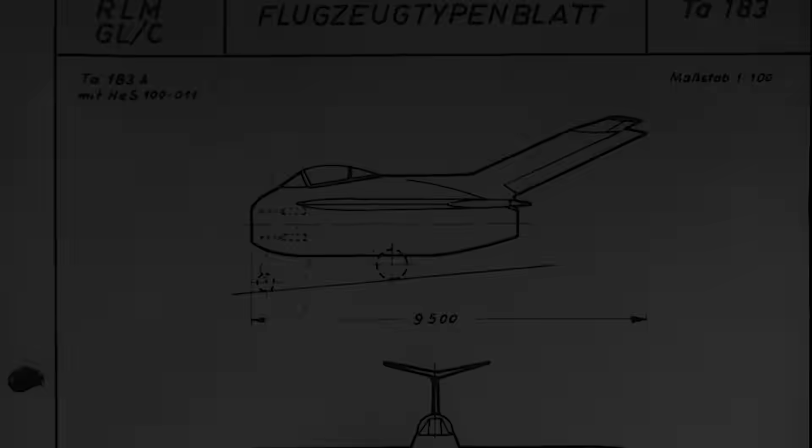However, they were admittedly very capable. The Americans captured Willy Messerschmitt and his P-1101 prototype, along with his aerodynamics team. The Soviets, advancing from the east, captured Berlin and all the technical documents, design plans and wind tunnel data reports from the Reich Air Ministry. But Focke-Wulf and their innovative TA-183 Hunchback design models were captured by the British, who then shared this information with the Americans. Anyway, perhaps not surprisingly, the TA-183 is the grandfather of both the MiG and the Sabre.

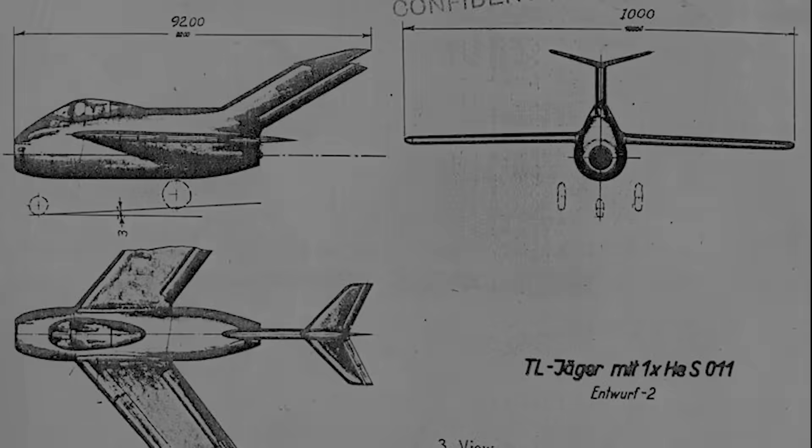But before this absolute mountain of captured data could be inhaled by American scientists, the US Air Force had already put out a request for a new jet. North American, the designers of the P-51 Mustang and B-25 Mitchell, were about to submit their own design, the NA-140, a denavalized version of the Navy's NA-138, which would go on to become the FJ-1 Fury. But before it was submitted, North American had a peek at the German data, and decided a highly swept wing would be far superior, withdrawing from the US Air Force competition to redesign the aircraft. The contract was instead won by the straight-winged Lockheed P-80, a character we will run into later.

The German data that these designers at North American were so interested in centered around swept-wing technologies and near supersonic flight. This is actually very important for both of these designs, especially when they came up against one another, so I'll try and explain very briefly.

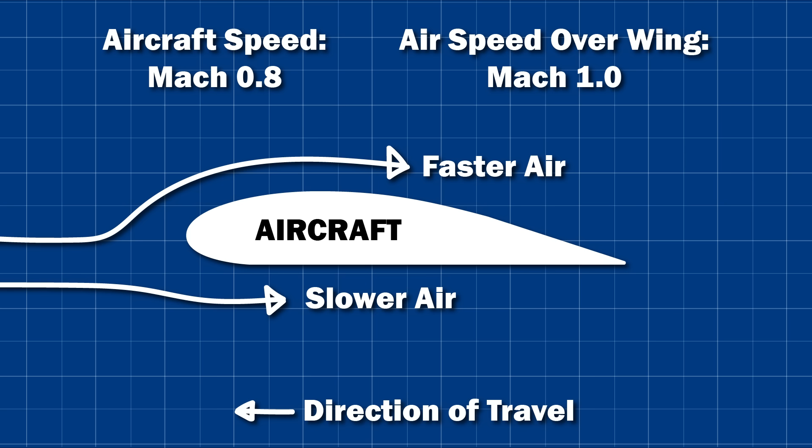Air travelling over a wing accelerates as it does so. It's an integral part of how planes fly. However, this means the air going over the wing is going faster than the aircraft itself. So, as aircraft got faster and faster, and started to approach the speed of sound, Mach 1, the air travelling over the wings would go supersonic, while the aircraft may have only been going at Mach 0.7 or 0.8. This is known as the critical Mach number of a plane, i.e. the speed of the aircraft at which the air over its wings is supersonic.

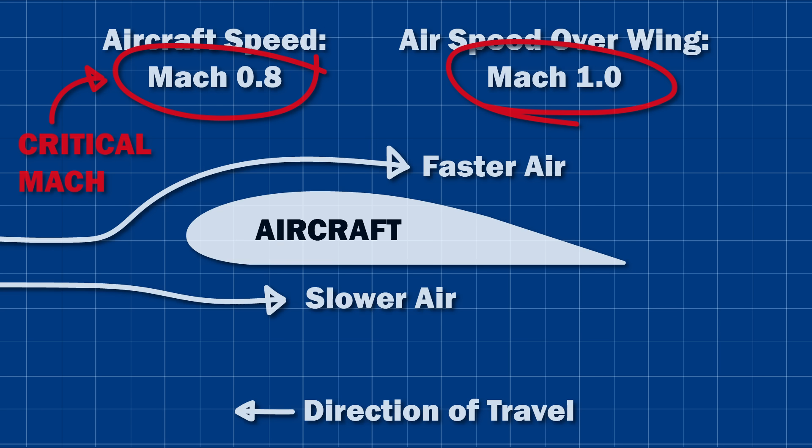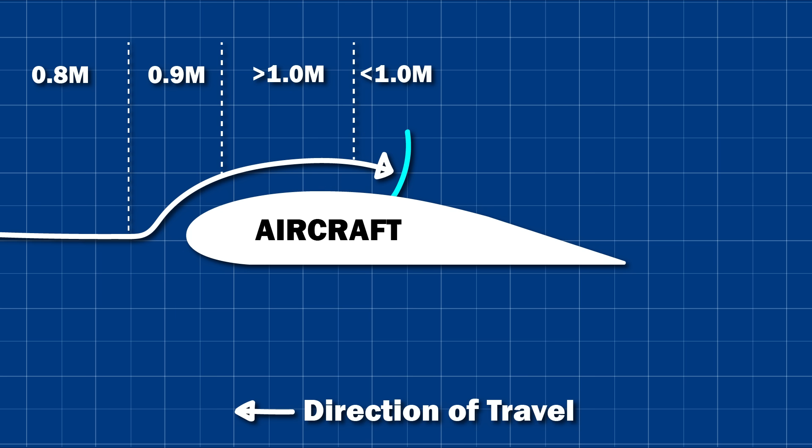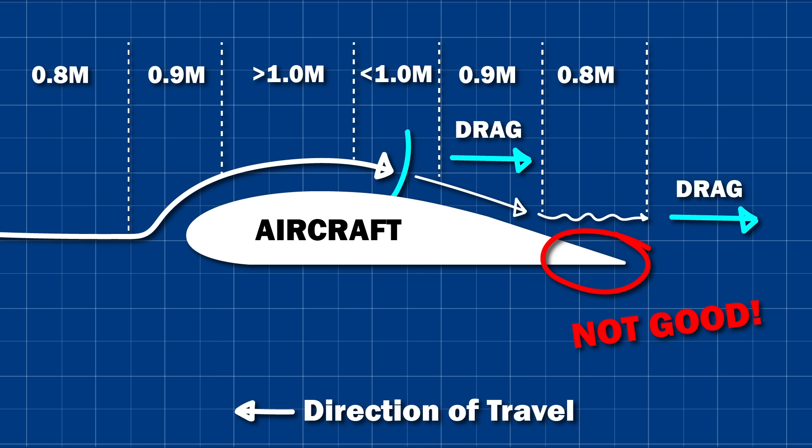But the issue is not with the air going fast, it is when the supersonic air must slow down again. When the air slows down below supersonic speeds around halfway along the wing, it creates a shockwave. This is not good. The shockwave is essentially a wall of pressure, meaning the air moving through it is slowed down considerably, creating drag. It can slow down so much that it separates from the wing entirely, causing even more drag. Both of these have massively negative effects on maneuverability, as the control surfaces are at the very back of the wing. The more you try and speed up, the bigger the shockwave, the more drag.

But if you sweep the wing, i.e.

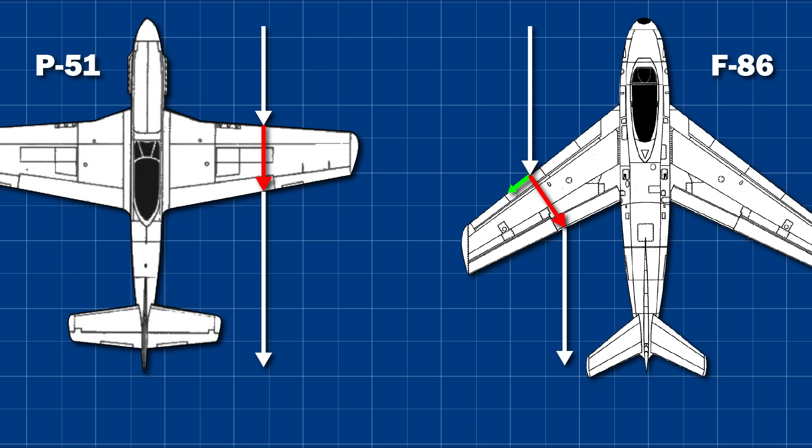Angle it backwards, and this changes things. Instead of all the air going in a straight line over the wing, you split it into two components. One goes across the wing, and one goes down the wing, but only the first component accelerates. Basic trigonometry dictates that this component is shorter than the original, meaning the air is accelerated less.

This means you can go faster before reaching critical Mach and getting punched in the mouth with shockwaves and drag. I hope that made some sense. But the question is, how far back do you sweep? Surely the farther the better? Not quite. It's all well and good having a swept wing when going fast with lots of air over your wings, but planes still need to land and take off. The more sweep, the higher the stall speed, and the trickier it is to maneuver at lower speeds. So it's a balancing act.

Hence the adoption of variable swept wings, like on the F-14 or the Tornado. For the F-86 though, the Americans balanced it at exactly 35 degrees. They also used advanced leading edge slats along most of the wing, which could be extended at lower speeds to increase lift. The F-86's fuselage was essentially just a big aerodynamic tube designed to fit an Allison J-35 jet engine, which provided over 4,000 pounds of thrust to the pilot, who also enjoyed a roomy cockpit, a large bubble canopy, and an ejector seat.

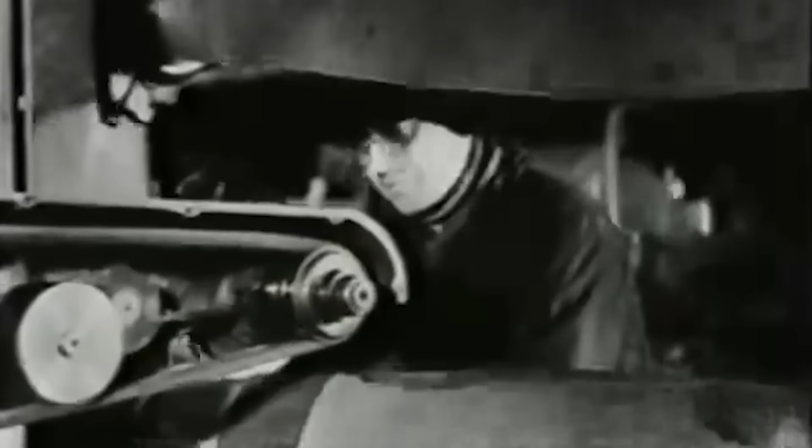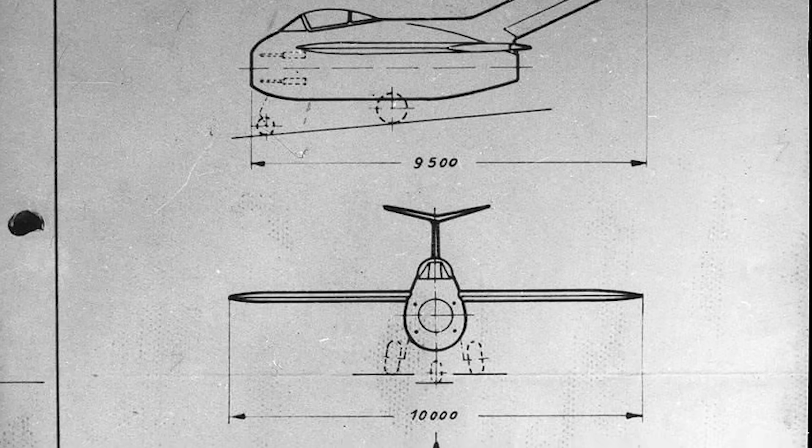But back to Mikoyan, the Soviet aircraft manufacturer, who are about to make some bold decisions. Unlike the Americans, Mikoyan's design was built from scratch, using the TA-183 as a base. They took the barrel fuselage, straight-through engine and T-tail, but decided that some aspects of the Hunchback could be improved, like the Hunchback itself. Instead of having the cockpit and fuel tanks on top of the engine, they put them in front of the engine. A more streamlined design, but a lot longer.

The engine in question was a reverse-engineered Jumo 004, the same power plant seen in the ME-262. You may remember that the ME-262 used 2 of these, and for good reason: it produced under 2,000 pounds of thrust. They were in a bit of a pickle. And they were, hilariously, saved by the British government.

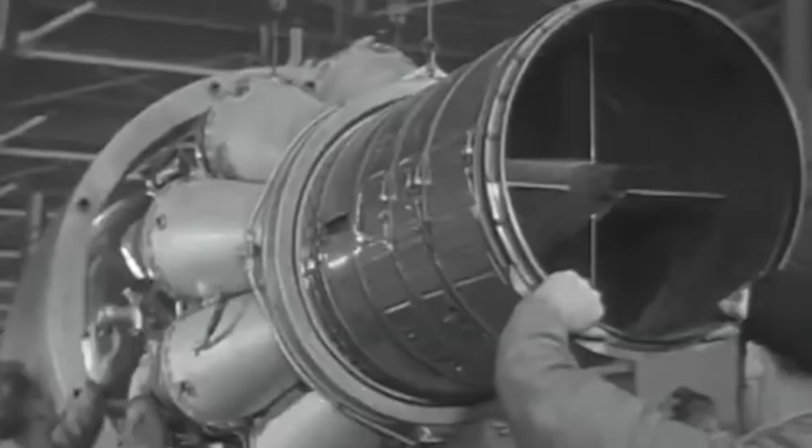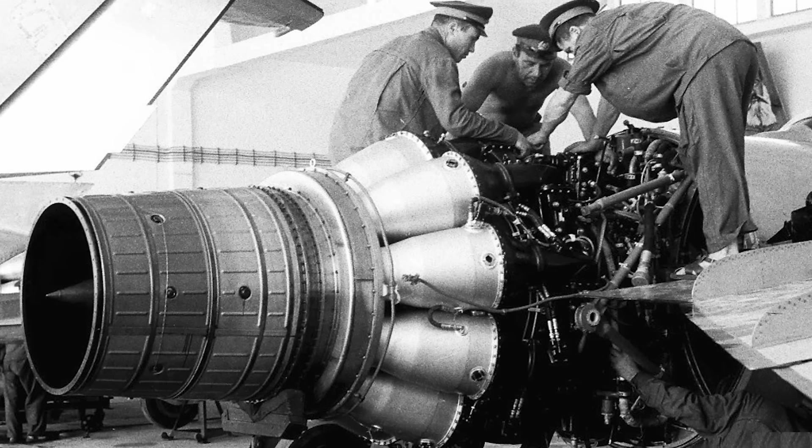In one of the most ridiculous diplomatic and engineering blunders in history, the Brits sold the Soviets 25 centrifugal flow Rolls-Royce Nene jet engines. But don't worry everyone, the British made them promise not to use them for any military applications. Klimov immediately reverse engineered it, and Mikoyan put it straight into the MiG-15. The Nene 2, now known as the Klimov RD-45, produced 5,000 pounds of thrust.

The trade-off for the 150% increase in thrust came in diameter. Centrifugal flow engines are wide, which meant the fuselage had to be wider to accommodate it. Short and fat aircraft are quite unstable aerodynamically, so they had to increase the size of the vertical stabilizer to stabilize things. A large tail makes it harder to roll properly though, so the wings were given a 2-degree anhedral, tilted down, to compensate for this. So while the massive engine was nice, it came with some aerodynamic cost.

Mikoyan came to very similar conclusions to North American, opting for a 35-degree swept wing, but their less advanced manufacturing techniques meant the wings were thicker and slightly weaker than those seen on the F-86. The MiG's anhedral wing meant there was too much air flowing down the wing, reducing lift, so they added wing fences to the top surface to guide the air over the wing and onto the control surfaces.

The MiG-15, then known as the I-310, first flew on December 30th, 1947, and while their performance was phenomenal, there were some issues. Rolling was still difficult, and at high speeds or high G, the MiG could flick suddenly into a spin due to its lack of yaw stability. A bigger tail might have fixed this, but would have made it even harder to roll, and vice versa. Pilots also struggled to see, especially on landing approach, thanks to the relatively deep-set cockpit.

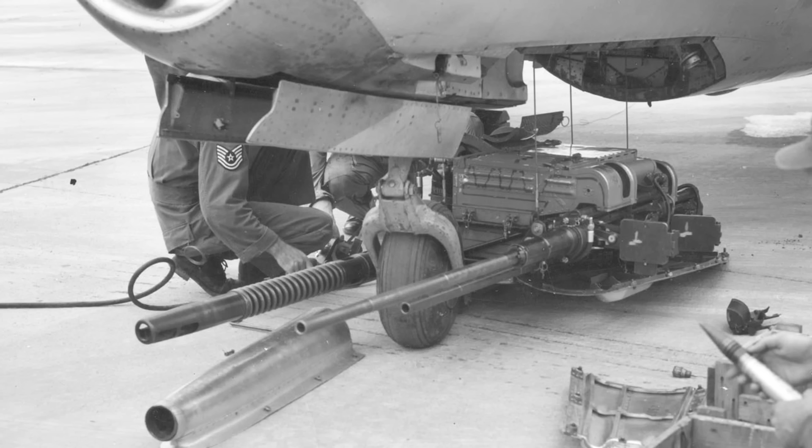Full-scale production of the MiG-15 was ordered in December 1948. It was intended primarily as an interceptor, climbing fast and to incredible heights to destroy American B-29 or B-36 strategic bombers, and the armament reflects this. In the nose of the MiG-15 is a 37mm cannon on one side and twin 23mm cannons on the other, the kind of guns tanks were armed with about 8 years earlier.

Anyway, now we know what we're working with. In the blue corner, a precision-made, high-tech dogfighter with all the bells and whistles and a reliable flight profile. In the red corner, a more manic, aggressive interceptor, harnessing raw power to accelerate faster, climb farther, and hit harder than almost every aircraft that came before it.

The Sabre had a higher top speed, the MiG could accelerate faster. The Sabre was better at diving, the MiG at climbing. The MiG could make tighter turns at high altitude and high speeds, but nearer the ground the F-86's leading edge slats would give it the edge. The MiG hit hard with its 3 cannons, but fired slower and had less ammunition compared to the Sabre's machine gun sextet. It was anyone's guess which aircraft was better. Luckily, we were about to find out.

25th of June 1950: North Korea invades South Korea. Korean War. The United Nations intervene. American P-80 jets quickly establish air dominance over the North Korean IL-10s and Yak-9s. American bombers go completely ape, flattening almost every target on the Korean peninsula.

UN forces landed in Incheon and pushed the North Koreans back to the Chinese border. China did not like this result and prepared for a counterattack. They recognized they would need air cover as they advanced over a series of vulnerable bridges on the Yalu River. The North Korean Air Force had been obliterated, and the Chinese PLAAF was nowhere near ready, so the Chinese commenced intensive training, learning from Soviet pilots who were deployed in China. In the meantime, these Soviet pilots from the 151st Guards Fighter Air Regiment were the ones providing air cover, with the stipulation they could not stray over the North Korean border and cause an international incident.

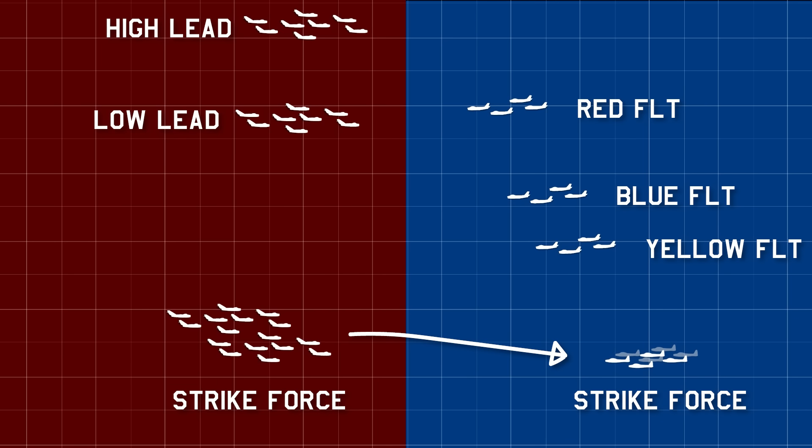Around 5 minutes later, a large MiG group of 16 aircraft would join the fray, taking advantage of the chaos to screech in at around 20,000 feet and attack the American strike aircraft, with a smaller 8-MiG group covering their attack from the marauding Sabre escorts. With fuel and ammo running low, the MiGs would depart, with a reserve group at the back keeping a close eye on their comrades and ensuring Sabres would not enjoy easy kills.

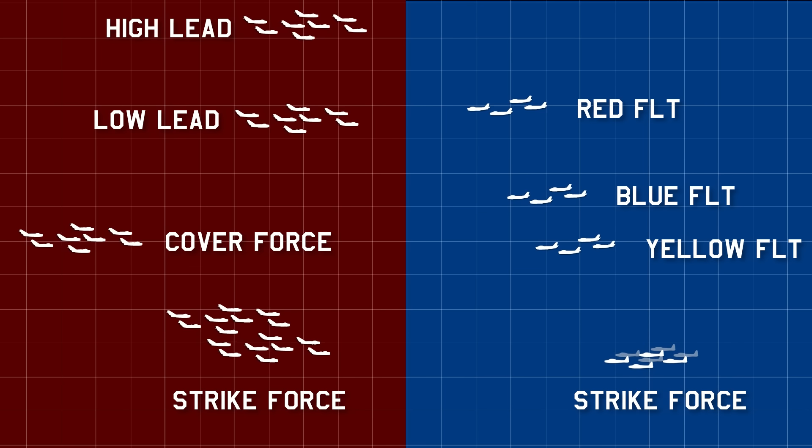It was an incredibly interesting game, with new tactics and techniques being trialled constantly by both sides. Does red flight stay high to engage the lead MiGs, or do they drop low to help the strike group? Does blue flight climb to help red flight or dive to help yellow flight? How does each 2-aircraft pair best help the other pair?